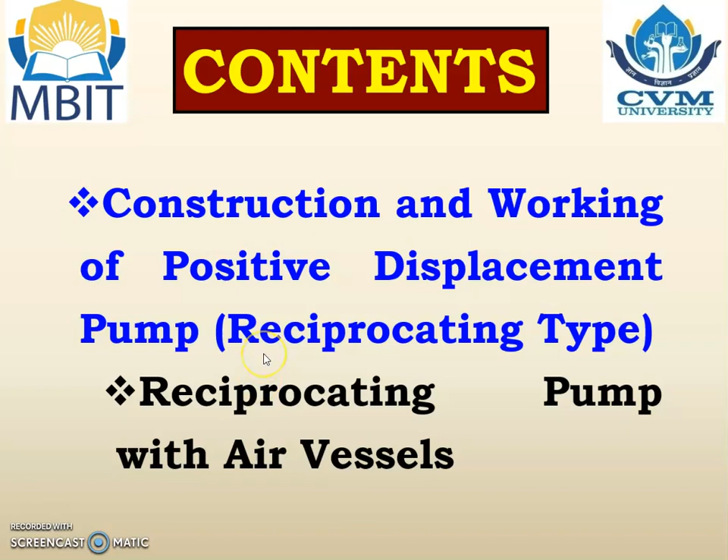In today's lecture, we are going to study about the construction and working of positive displacement pump, particularly reciprocating type pump, and in that, reciprocating pump with air vessel. So this is a sketch for the reciprocating pump with the air vessel.

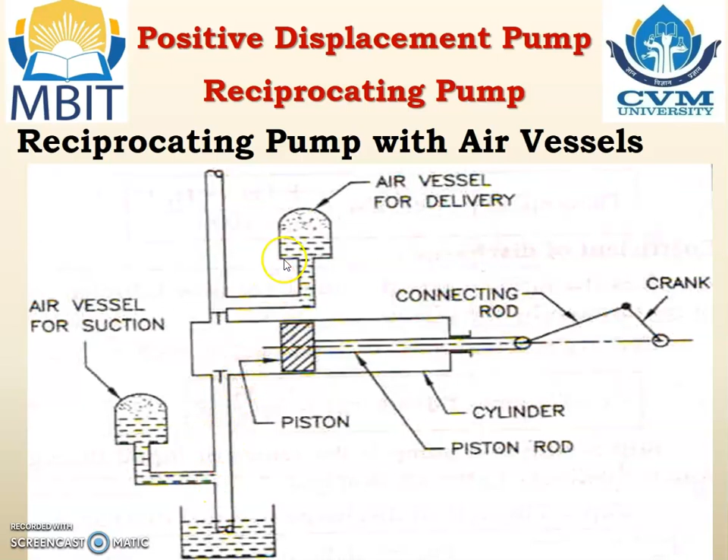So here you can see that in the reciprocating pump, air vessels are connected. Air vessel is connected with the suction pipe as well as with the discharge pipe. Now what is air vessel? Air vessels are a closed container or a closed vessel in which half part is filled up with the water, that is the bottom portion is filled up with the water, and upper half part is filled up with the compressed air. So upper half is having air.

These air vessels are installed very near to the suction valve and discharge valve to avoid the friction or separation. It means air vessels, whether in suction pipe or discharge pipe, are connected near to the suction valve as well as the discharge valve.

Now the importance of air vessel. Without air vessel, friction head increases and reaches a maximum value at mid stroke and decreases to 0. It means if we are not using the air vessel, then whenever piston is moving from left hand side to right hand side, the friction head is going to increase, it will be maximum at the mid stroke, and then after it will decrease.

And with air vessel, frictional head is constant throughout the stroke. It means if we use the air vessel, friction head will be constant. So it will not be increasing or decreasing. It will be uniform.

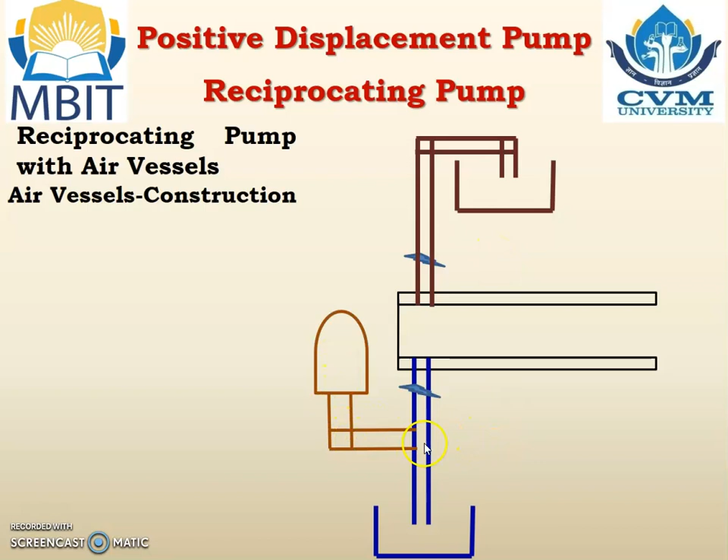Let us see the construction. This one is the cylinder. This is the suction pipe, this is the sump level, this is the suction valve, this is the discharge pipe, overhead tank, and that is the discharge valve. This is the air vessel connected to the suction pipe, and this is the air vessel which is connected to the discharge pipe.

Normally, without air vessel, what happens actually? Our first stroke is crank moves from 0 to 180 degree, and piston moves from left to right. That is my first stroke, you can see here. Piston is moving from left to right and crank moves from 0 to 180 degree. And second stroke, crank moves from 180 to 360 degree and piston moves from right to left.

Now let us see the first stroke with the air vessel. First stroke is crank moves from 0 to 90 degree only and piston moves from left to mid. As we know, if we use the air vessel, friction head is constant, and if we don't use the air vessel, friction head is increasing and at the middle it will be more. So for that let us study the working of air vessel.

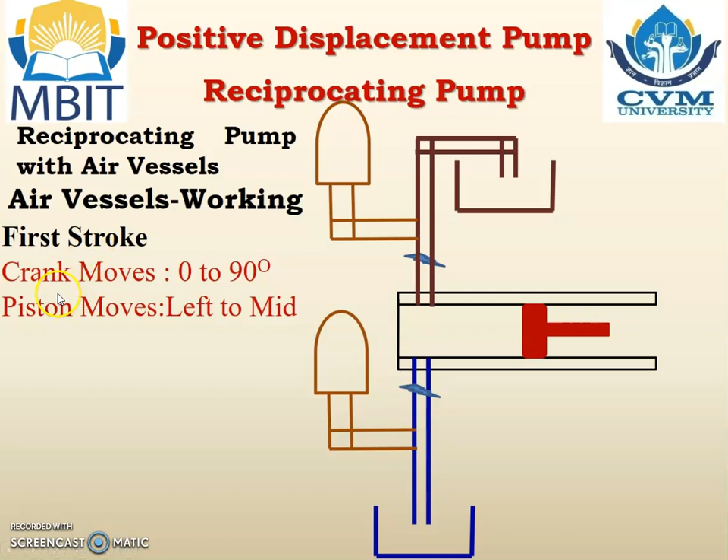In the first stroke, crank moves from 0 to 90 degree and piston moves from left to mid. During that time, the vacuum generated in this region will be more. Due to more vacuum, more liquid will be lifted. And as more liquid is lifted, it requires more space in the cylinder. But the piston is at the mid, so less space is available. So we have more liquid, but less space in the cylinder.

So what will happen? The extra liquid will be filled up inside the air vessel. Extra liquid will be entering into the air vessel and the air will be compressed at the top. So that is the first stroke when piston moves from left to mid. Now let us go for the next.

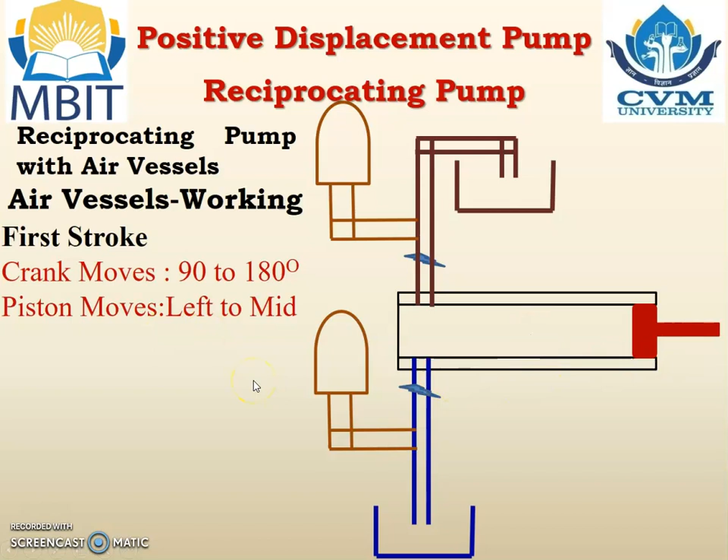Now piston moves from mid to right. So crank moves from 90 to 180 degree. Piston moves from mid to right. During that time what happens? Vacuum generated is less because already water is filled up. As the water or the liquid is filled up, vacuum generation will be less. And as less vacuum is generated, less liquid will be lifted up.

But the space in the cylinder is more because now piston is at the right hand side portion. So we have more space in the cylinder but less liquid is lifted. So in that case what will happen? The compressed air exerts the pressure on extra liquid. So whatever extra liquid was filled up previously here, the air will be exerting pressure on it, and that extra liquid is filled up inside the cylinder. So that is the working of air vessel in the suction pipe. Similarly, the air vessel works in the discharge pipe also.

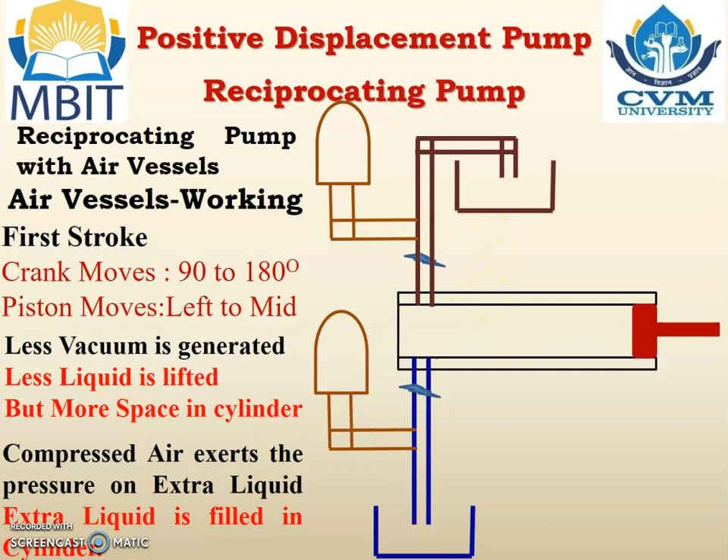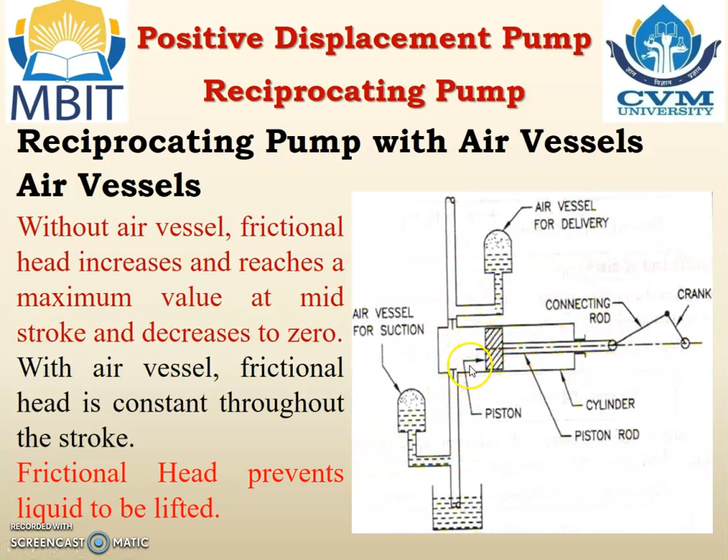So now, again understand this thing. Without air vessel, friction head increases and reaches a maximum value. So whenever piston reaches the mid position, friction head is more. And due to that, less liquid will be lifted and less liquid will be filled up. But if we use the air vessel, then friction head will be less and ultimately constant throughout. So more liquid will be lifted and it will be filled up inside the cylinder.

Now what are the advantages of air vessel? To obtain the liquid at uniform discharge. So we have studied how the air vessel helps in uniform discharge. Reciprocating pump can run at high speed without flow separation. So due to the air vessel, it can run at high speed. Reduce the possibility of separation and cavitation. So some disadvantages can be reduced if we use the air vessel.

Suction head can be increased by increasing the length of pipe below the air vessel. It means we can lift more liquid inside the cylinder. Large amount of power is saved due to low acceleration head. So as we use the air vessel, the friction head and the acceleration head reduce, and due to that, the amount of power required is reduced. So these are the advantages if we use the air vessel.

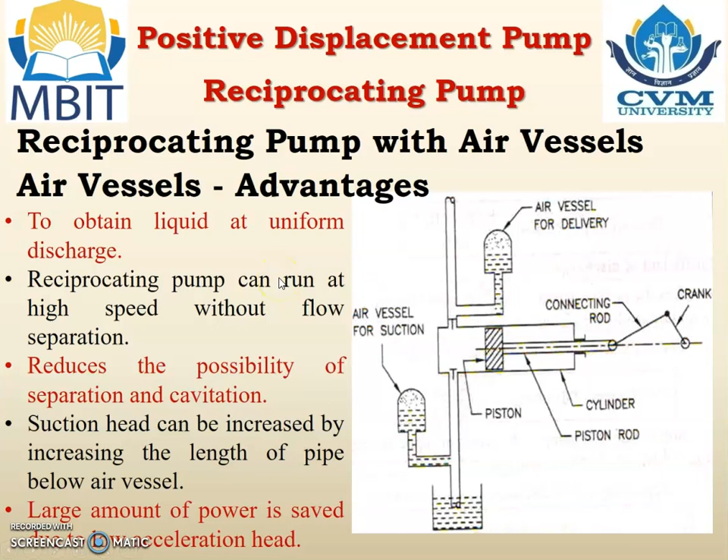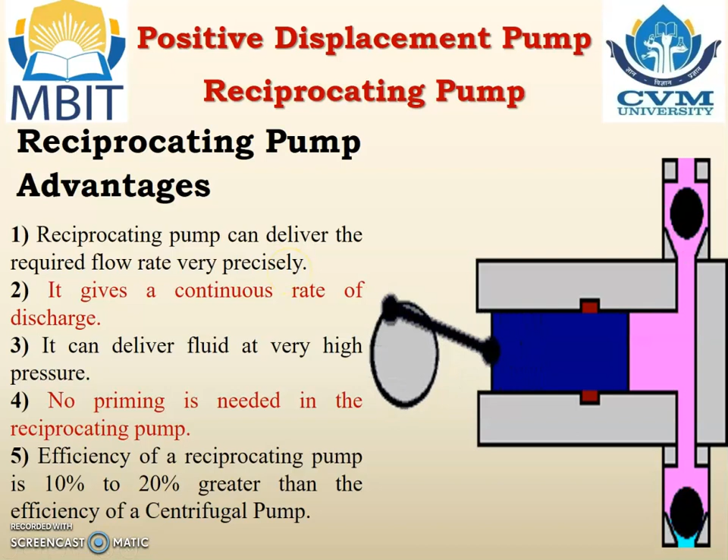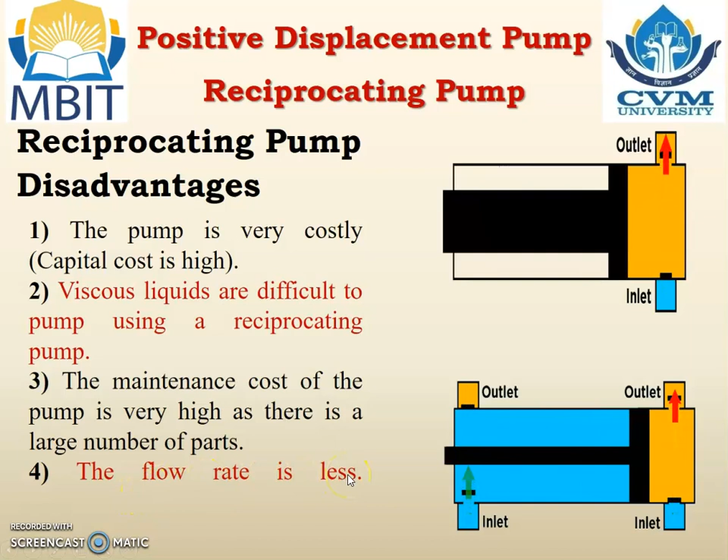Disadvantage: pump is very costly because capital cost is very high. So initial cost is very high. Viscous liquids are difficult to pump using the reciprocating pump. So if we are required to pump or increase the pressure of viscous fluid, it is very difficult. Maintenance cost of the pump is very high, as there are a large number of parts and moving parts, particularly reciprocating motion. And last one is flow rate is less. So we are not getting a large amount of liquid lifted.

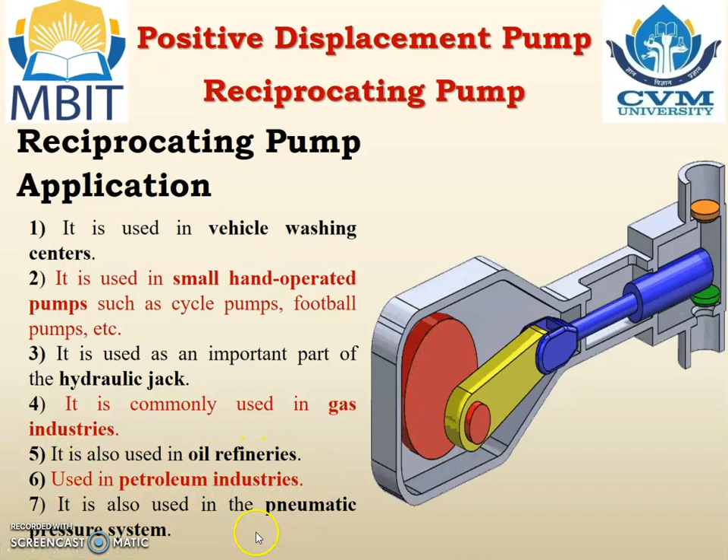Application: it is used in vehicle washing centers. It is used in small hand operated pumps such as cycle pumps and football pumps. It is used as an important part of hydraulic jack. It is commonly used in the gas industries or industries like oil and petroleum industries, and it is also utilized in pneumatic pressure systems.